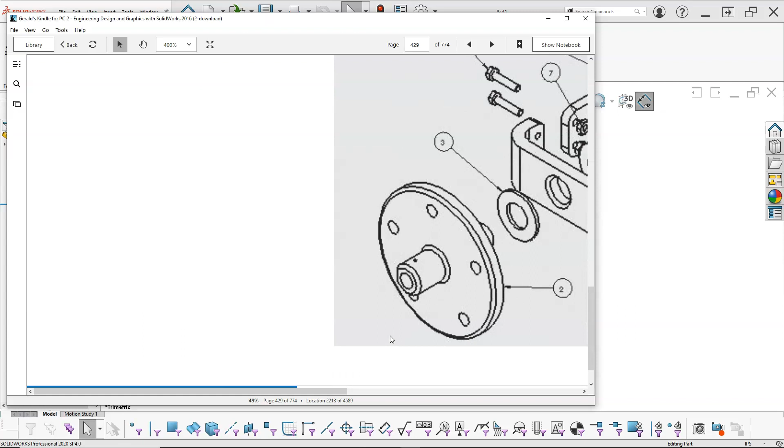Looking at the wheel, it didn't make it into the bill of materials, which is kind of strange. So we can fly over. Oops, that wasn't it. Alright, so let's bring it back down.

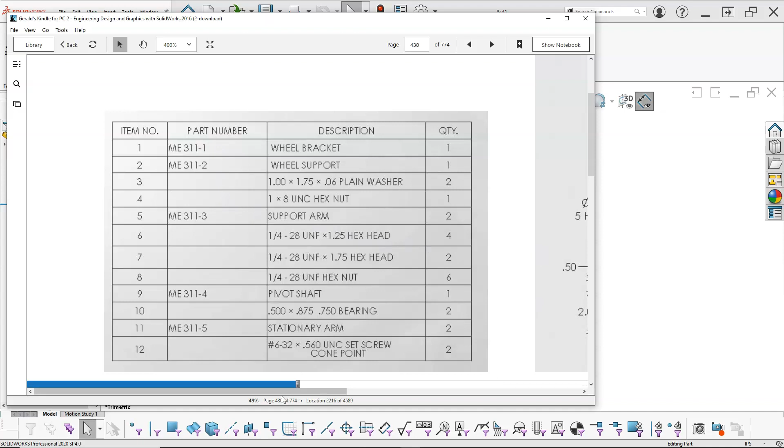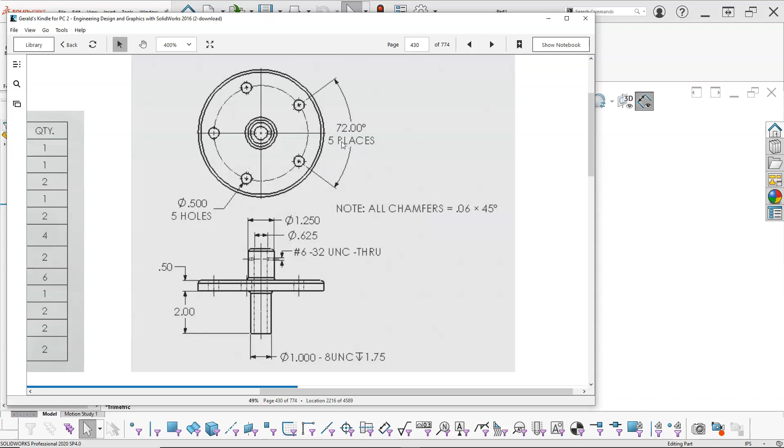Alright, so we have a .625 through, and then the #6-32 set screws coming in from the side. That looks more like a radius, but everything's been called out as a chamfer, so we'll go with that. And then 72 degrees, 5 places on the holes, so 1/2 inch holes. Pretty straightforward. We should be able to do that as a revolve.

And then we have some choices to make on the threads. So front plane, anytime we do the revolve, center line, vertical, infinite length.

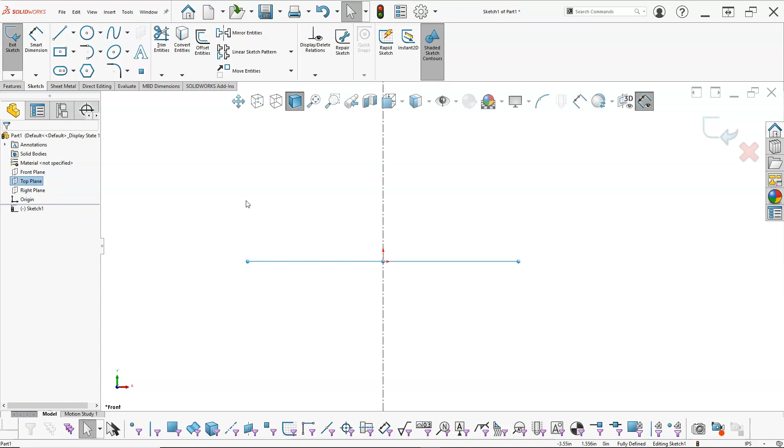Now when I bring this into the assembly, the top plane would probably have been a better choice, but we'll reorient as needed. Because the .625 is through, we want to start off of the center line some distance, and I either need to start and go up or start pretty much even to the origin and go down.

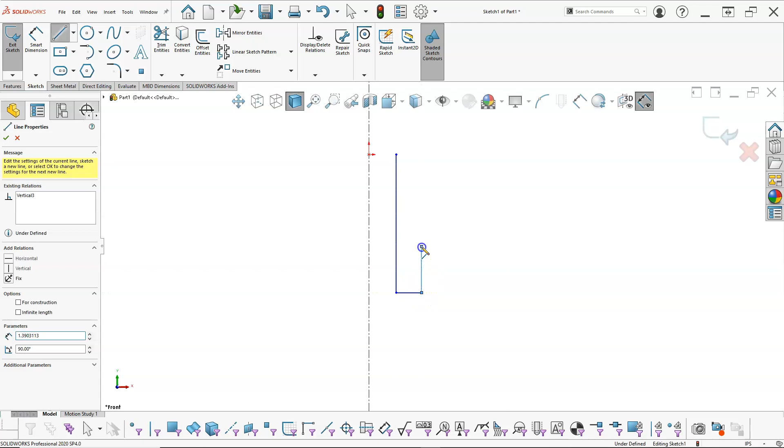So we have a stack up of numbers. Looks like a few more missing dimensions, so we'll go with what we've got, and I'm just sketching the rough shape.

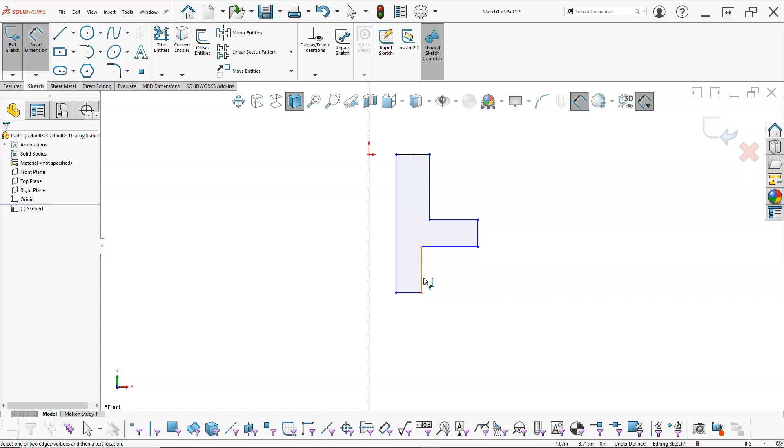And the top was 1.25, so I don't want to pick that up. Alright, so I can control select the origin, and those will be coincident. We'll put in a few dimensions, so I know the bottom is 2 inches, and then a 1/2 inch for the leg.

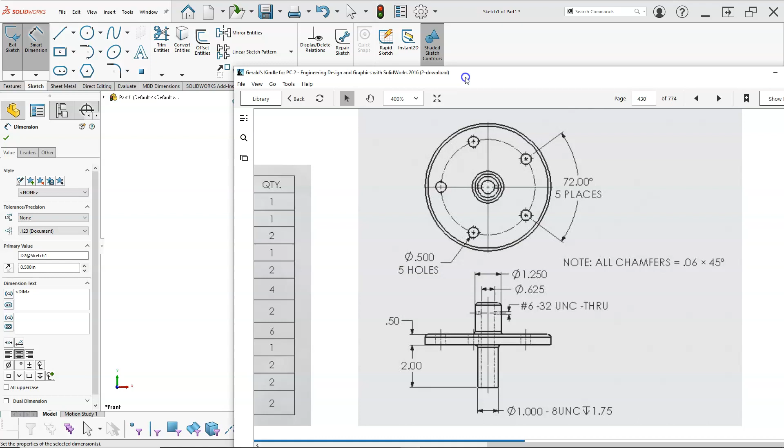So it looks like we might be missing a right side view. The top, just kind of looking at that, doesn't look like the 2 inches, so maybe 1.5 inches.

All right, so if you don't get all of the dimensions, then you get to pick those, and we'll figure it out later. All right, so 0.625.

As soon as I pick the center line, I'm in diametral, and once I'm in diametral, if I'm between the center line and the object, I'm going to get radial. If I go to the other side, I'm going to get the diameter. So when I pick, I'm automatically in diametral, and now it's not really picking up the radial.

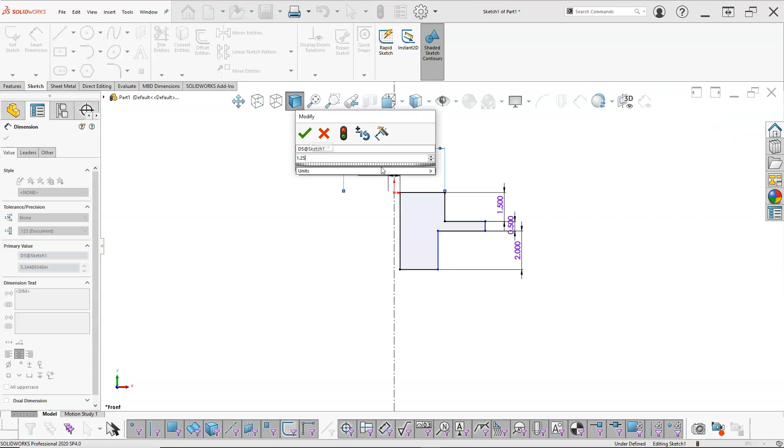So 1.25, and that kind of reversed. So we're going to go to the major diameter of the thread, 1 inch. And then the outside...

Well, looks like we have another missing dimension, so looks like about 3 inches, maybe a little bit more. Let's go 4 inches.

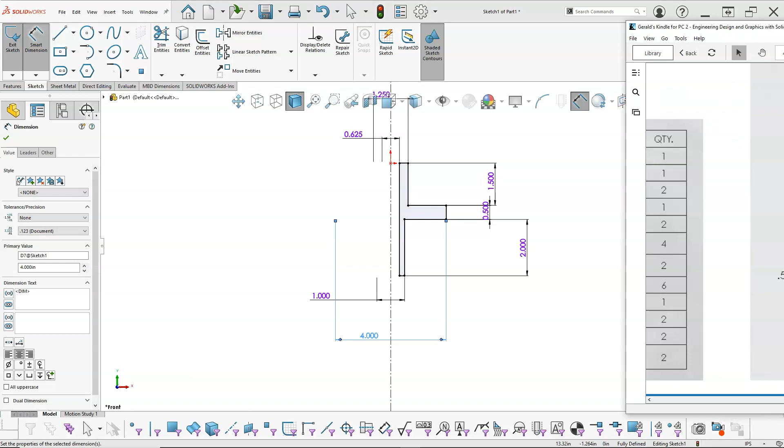Alright, so that being the case, and without any other details, the bolt circle, 1/2 inch on 5 holes in the bolt circle. Well, that looked like it could be 3 inches. And when the center, we did the 1.5 inches. Maybe that would be 1/2 inch or 3/8 of an inch.

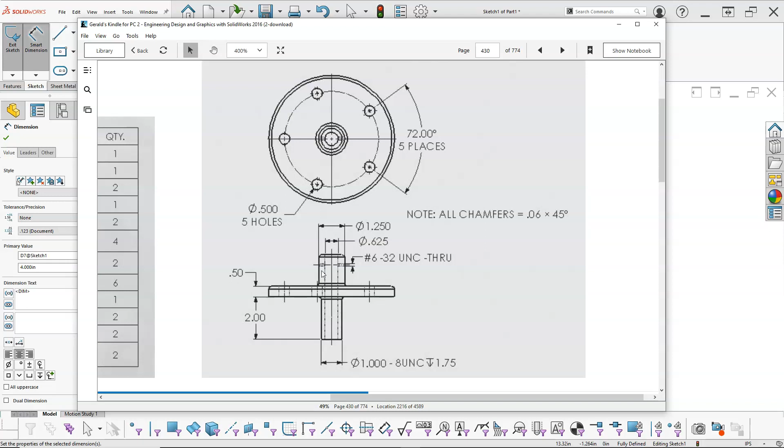So pick the numbers as you go, and we will go into the revolve, and accept for the 360 degrees.

Alright, so the 1 inch 8 is to a depth of 1.75.

So we can come up to the insert, annotations, cosmetic thread. Since I didn't pre-select, we'll grab the edge, tell it that we're doing an ANSI inch, and 1 inch 8 it found.

Up to next, we want to be a blind condition and go to 1.75.

If we wanted to put in the thread class, show type - I didn't notice that. So we can do the 1 inch 8, and if we add the thread class, 1 is the loosest thread, 2 is the standard, 3 gets to be a really tight tolerance thread. So we can make that a 2A and go ahead and accept.

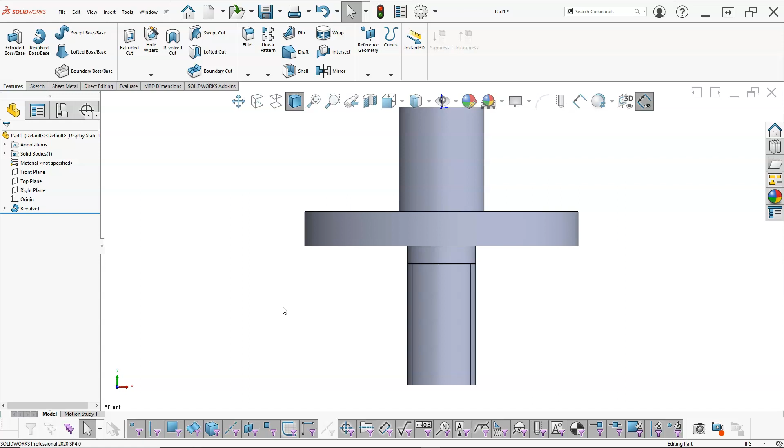Holes through the top. So S key, and we'll go to the hole wizard. Oh, forgot I put the cosmetic thread on my S key.

Alright, so this is going to be a through hole. We'll switch back from ANSI metric to ANSI inch, and I want to go to the filter and pick up fractional drill sizes. That'll be a little easier to find the 1/2 inch.

And even with all those fractionals going out to a 64th, if you want to add or check for the show decimal values, then you can pick that.

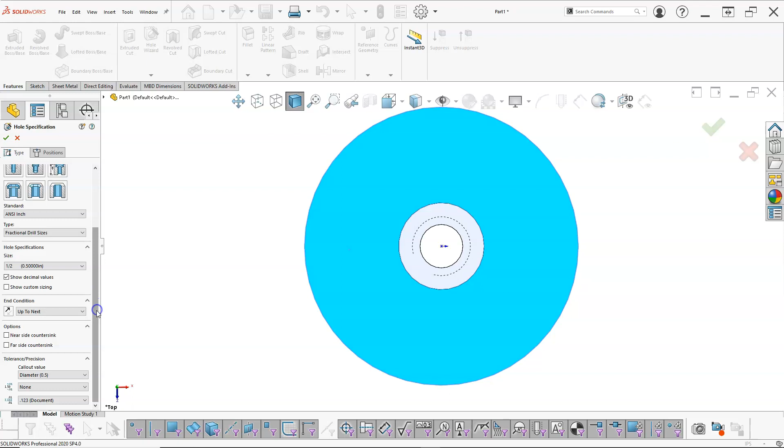And our end condition here will be up to next. So to just go through the body of the part, apply our first hole location.

I'm going to do this as the circular pattern. So when I draw the circle, come immediately over to the for construction.

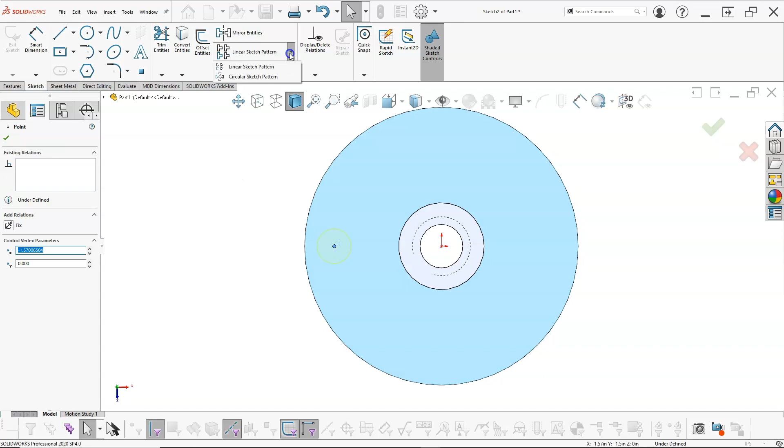Let's undo that and build this with just the circular pattern. So, circular sketch pattern, we're going to have a total of 5. If we dimension the radius and the angular separation, it's going to be 360 degrees. It switches from equal spacing to 72 degrees, and our radius can be 1.5 inches.

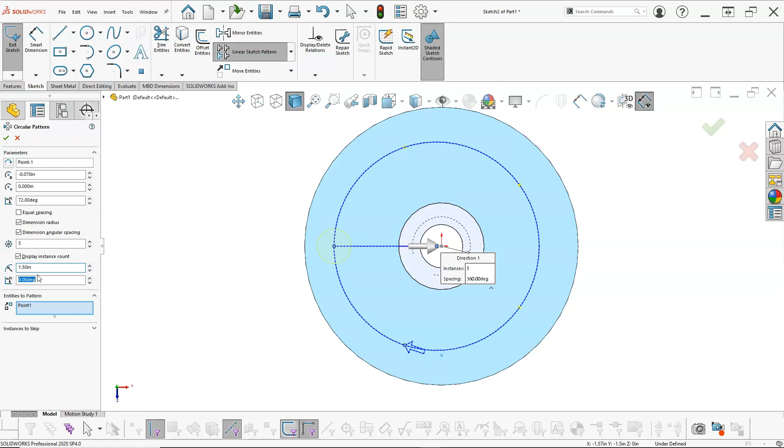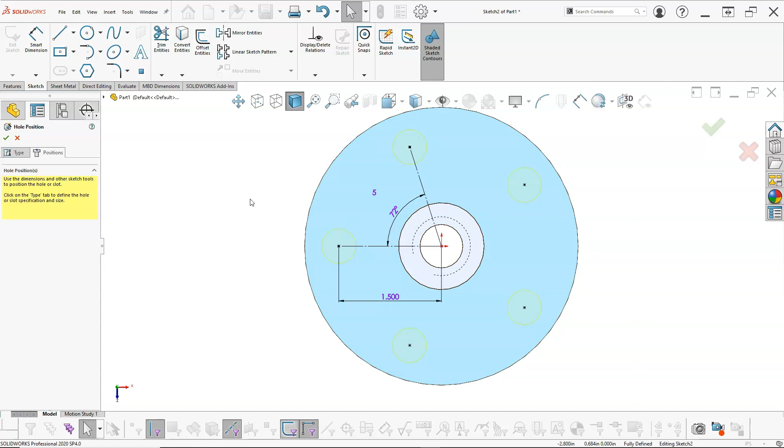If I go that route, then we end up with the center lines. This is still able to shift and move around in position, so I have to add the relation for the end point of the center lines back to the origin, and one of those will need to be horizontal or vertical. Now it'll get me fully defined. I still think in terms of the bolt circle, but just be aware there is a second option there.

Okay, so that's looking pretty good. The 6-32 through, it doesn't seem like that needs to be clocked in any specific angle. So if we want to try the 3D sketch again, we could go that route.

Go for the hole wizard, pick up the threaded hole. We'll rotate up until we find the 6-32, and up to next would stop it on the near side. Don't know that those would need to be clocked, so let's just go ahead and say through all, which will go through both walls.

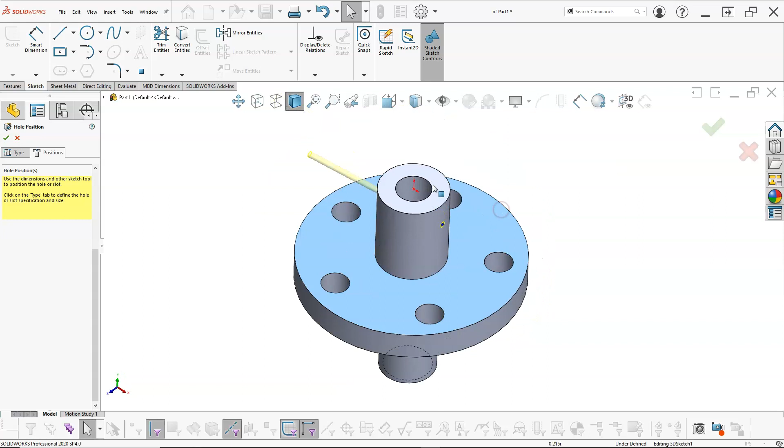And if we turn on the thread class, that'll be the 2B, and we'll just see that those are a little bit different. So we place it. Notice the through all goes through the far wall, but the terminating feature is the outside of the wheel. So if I go to the front plane and to the point, we can make that on plane, which will give it a vertical orientation and keep it from rotating around the cylinder.

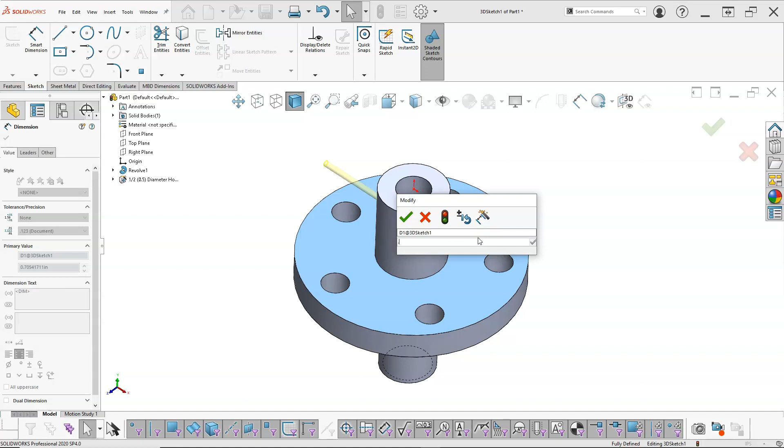And then we need a dimension, let's just see what half inch looks like. So scale wise, maybe a little bit... I slipped into 2 decimal place mode, 375. Alright, so one of those two will work, and we'll go ahead and accept.

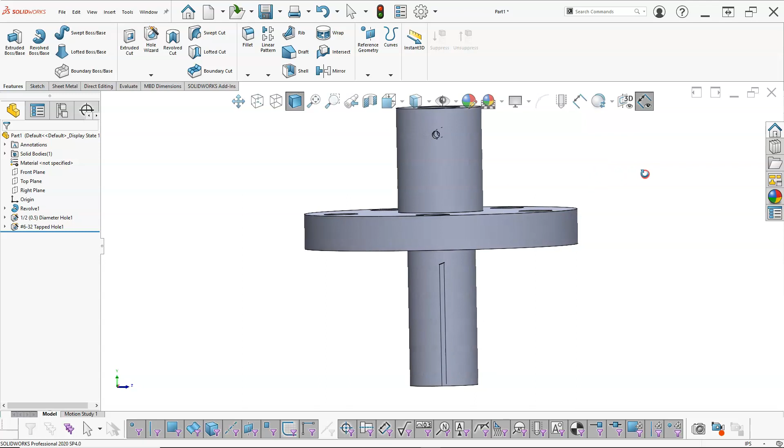Alright, so that goes through both. Doesn't look like it pulled the cosmetic thread, but the starting site is there, so that looks pretty good.

And we'll go ahead and start putting in the 60 thousandths chamfers. If I place one on the bottom as well, it kind of looks like there's one there. The intersection of the thread that's actually going to be there would have a little bit of that angle as well.

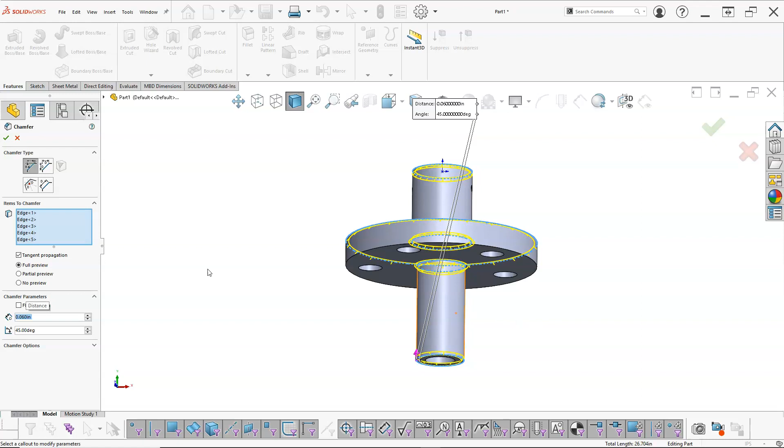So I change it to 60 and set the values. That looks pretty good as far as scale. Might be 5 inches on the diameter with a 4-inch bolt circle, whatever you want to make it.

So let's go ahead and save this, and we'll come back up to the assignments, create a new folder. And this one is going to be the wheel.

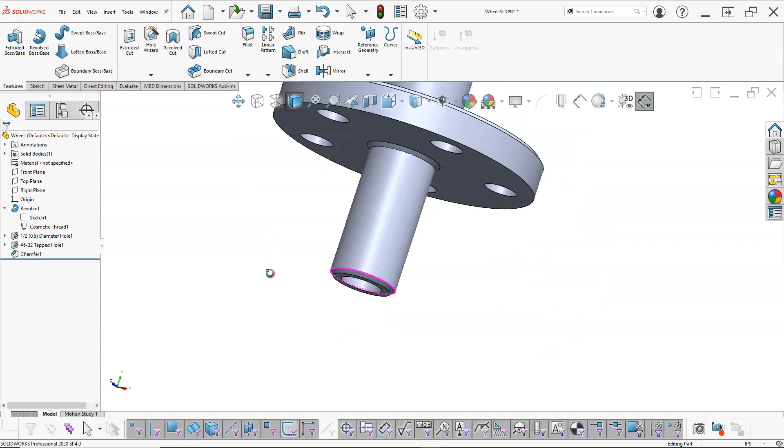Alright, so optionally, if you want to go through the process with the hole wizard thread, we're also going to go through a kind of a custom thread. So in our list of cosmetic threads, if we go back and edit that real quick, and we pull for the 1-inch, well, it looks like 1-8, 1-12, 1-14. Let's just say that this was an oddball size, a 1-inch 20 or something. Then we would either have to go into the database, or we would have to create a threaded swept cut for the thread. So this is the process, and mainly it's by way of introduction.

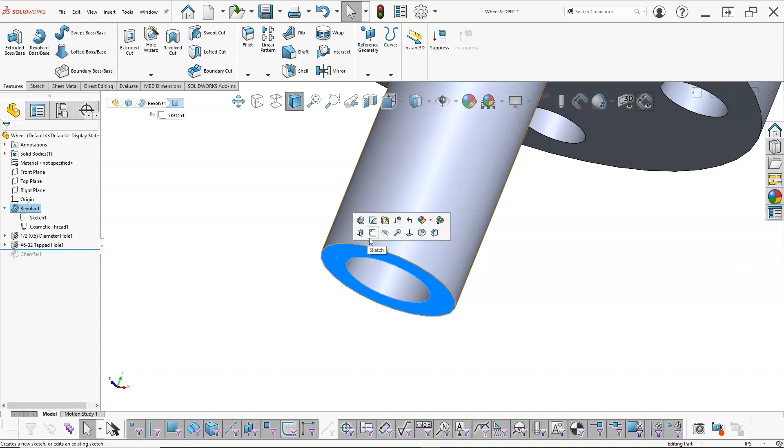If you want to try it, then go ahead and give it a shot. So open up the sketch. I don't necessarily want to convert the entities just yet. Normally if this was solid I would just convert the entities, but here I'm going to pick the outside edge, so I only get the one edge. That gives me a starter for my curve. So coming up to the curves, we're going to create a helix spiral.

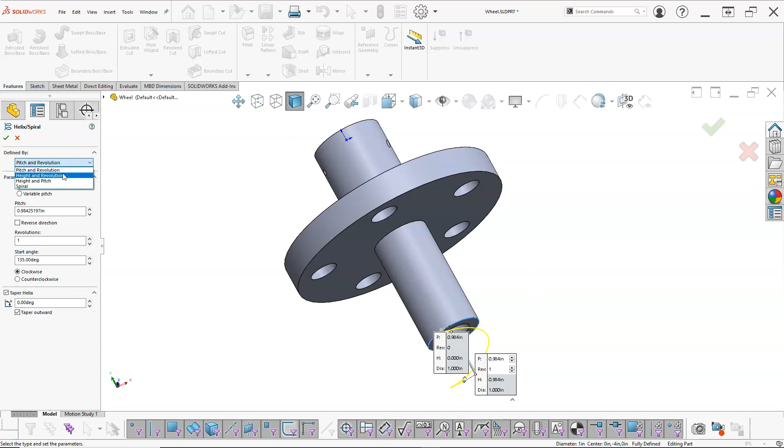It needs that circle to know what it's doing. In our choices we have pitch and revolution, height and revolution, height and pitch. So the height was 1.75, and the pitch will be 1 divided by 20, which is 50 thousandths.

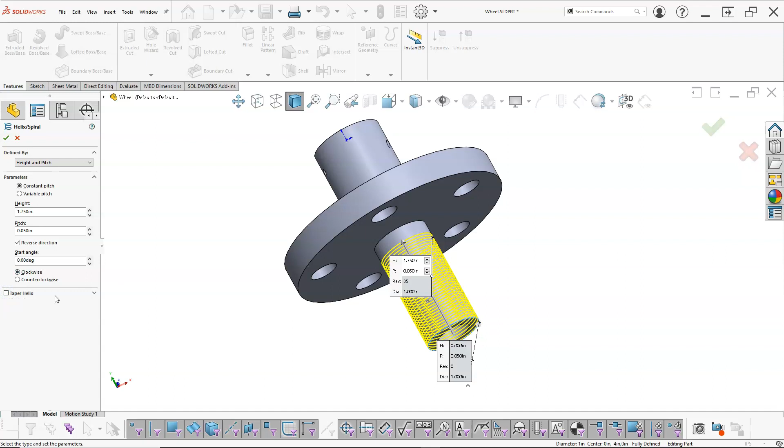And then it's not going the right way. I don't want to start on a 45-degree angle, so one of my quadrants, 0, 90, 180, 270. So 0 is good, just pay attention that it's pointing over to that side. Taper helix—not sure why that was on, maybe a default. We'll go ahead and accept. Alright, so that shows me the helix.

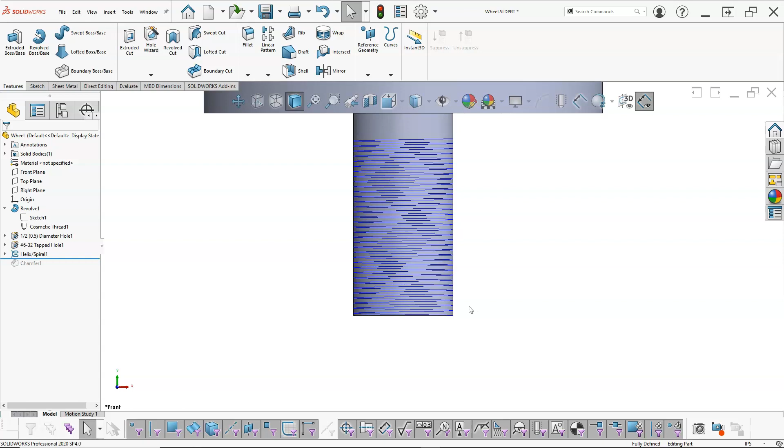And I can see that the spiral kind of comes around and terminates right at that point. So when I'm looking at the sketch, I want to draw my thread form on the front plane. Oh, and then by habit I did the rollback above the chamfer.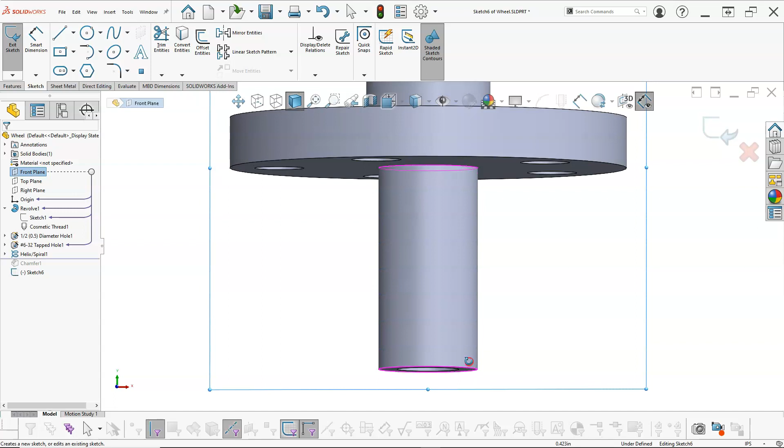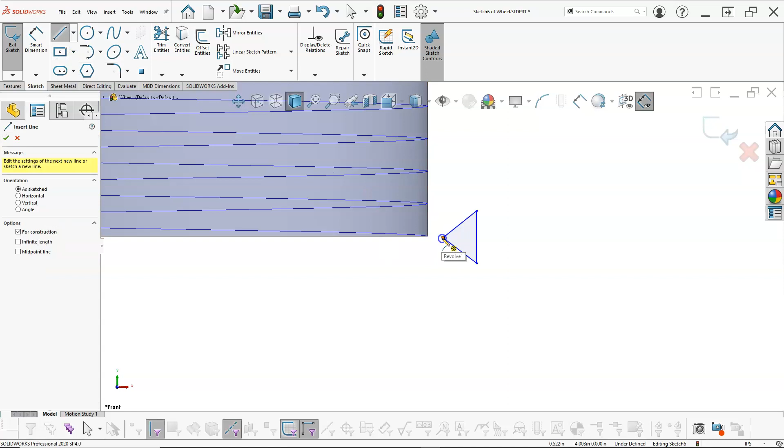Mainly I know that I'm going to create an error, or I'm pretty sure I'm going to create an error at the chamfer, and my strategy or process is that chamfers and fillets typically come last. Alright, so let's go ahead and put in—if we wanted to draw the complete thread form, we could go into Machinery's Handbook and look at the root and the peak, and make this a little bit more complicated, closer to a real thread.

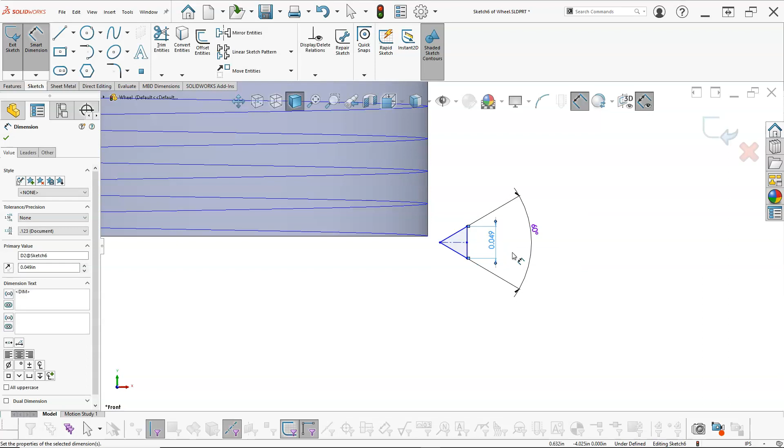So let's see, did that pick up horizontal? No. Sharp V thread is 60 degrees. And the height for the pitch is 50 thousandths, but I actually need to be a little bit under it so that the two cuts don't overlap.

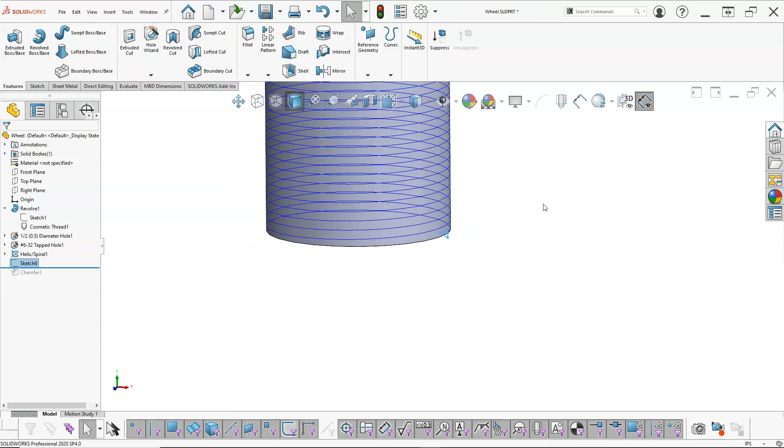And then to make sure that we get a complete cut, I'm going to go to the midpoint and the curve, and we will pierce. So what pierce does—where coincident might be able to travel all the way across that face in that plane, pierce says there is a solution where the plane intersects the curve here, and there is a solution where the plane intersects the curve here, and that's it. Coincident has a variety, or a lot more solutions.

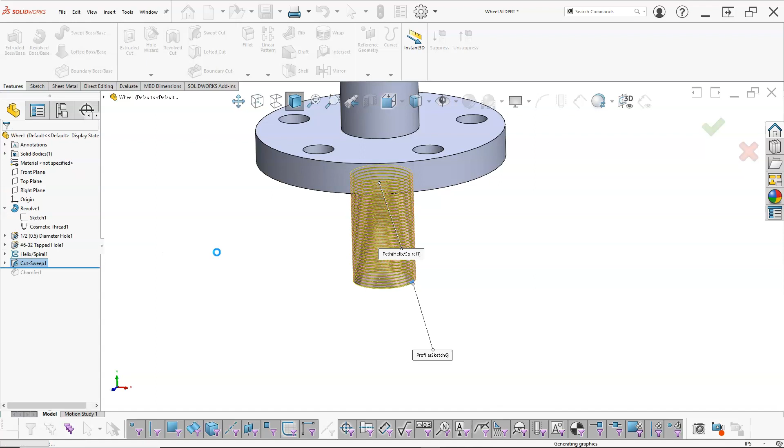Alright, so we could do a swept cut if this was a positive boss base. We have the profile, and the path is the curve, and as it makes the cut, then we can generate the thread.

Alright, so I need to go back and hide the helix, and then if I roll the chamfer forward—actually I'm surprised the chamfer was left on the bottom—but you can kind of see that terminating feature so that we don't end up with a partial thread at the base.

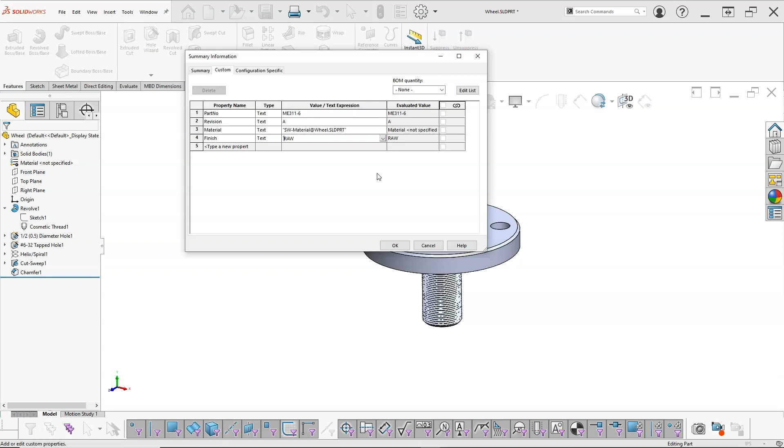The material, let's make this one—we'll pick it up here in a second. Material, and then finish will be just raw on the part. Alright, so material, let's make this a 303 stainless. So I got it at 304 here, so not too much difference between 304 and 303 stainless, so we'll stay with what we have.

So we should be seeing those come over into the file, and because these are set to custom, it will be for all configurations. So like we did last time, I think I should have a threaded and a non-threaded configuration.

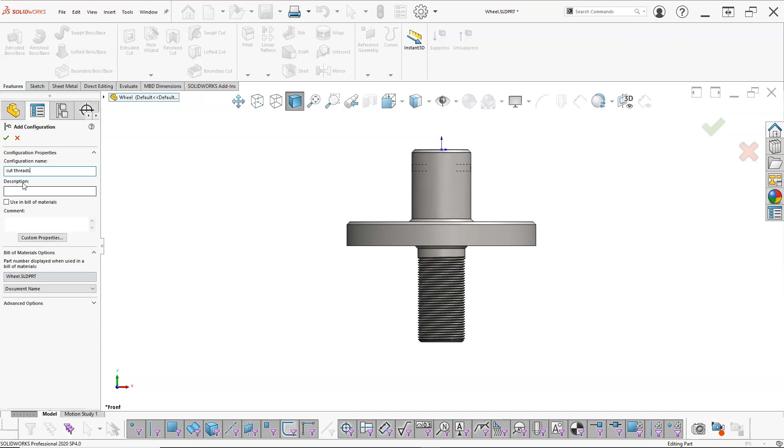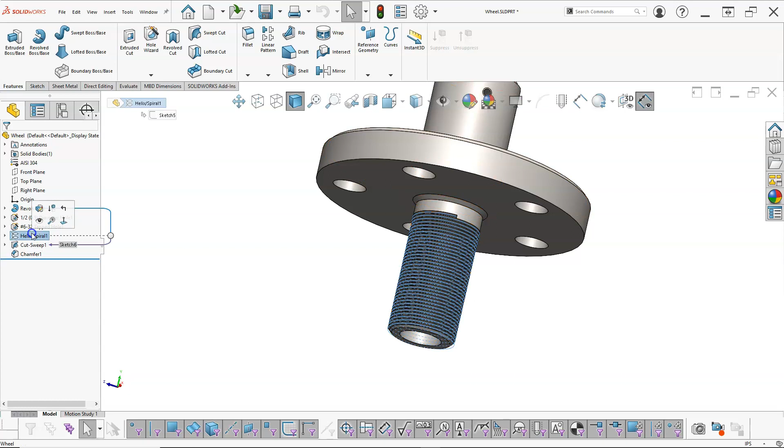So at the very top, we'll do the cut threads. And really, now, I could have easily made this the 1-20, or 1 inch-8. I'm doing this more as... I did these as a 1 inch-20 for the example. And if I just change the values from the helix and the profile to 0.125, 1 divided by 8, I could have the 1 inch-8 thread.

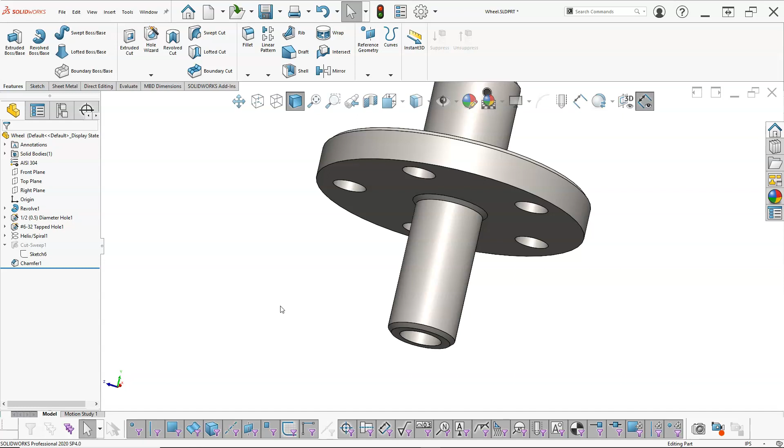So on this group we need to suppress. And the other reason for doing the rollback on the chamfer is that since it doesn't participate or have any child relationship to the cut sweep, it's less likely to generate an error after we create the suppression state. Alright, so that's ready to go into a drawing.